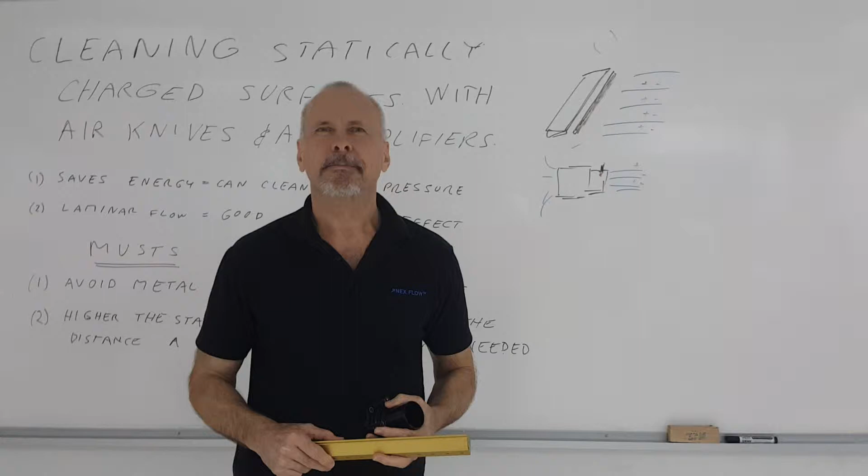The use of air amplifiers in cleaning a statically charged surface can be quite advantageous in several ways. This is how they work.

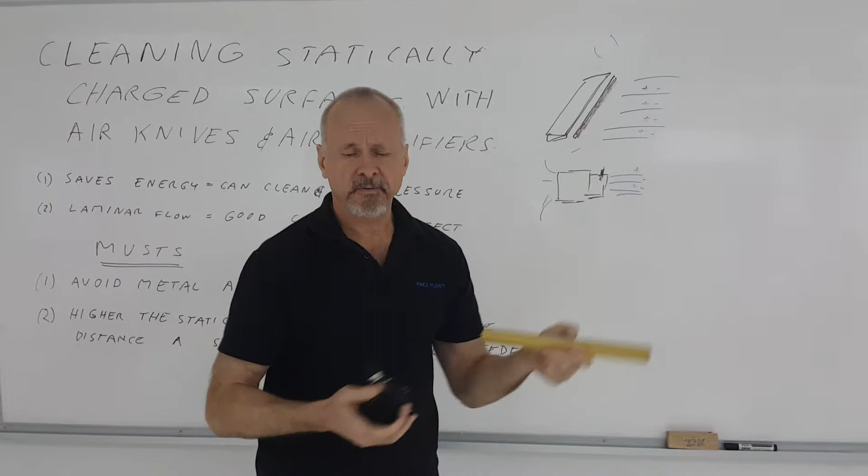In my one hand I have an air knife, which is great for cleaning a flat or curved surface. In my other hand I have an air amplifier, which is great for cleaning a surface that can be like a container or an odd shape.

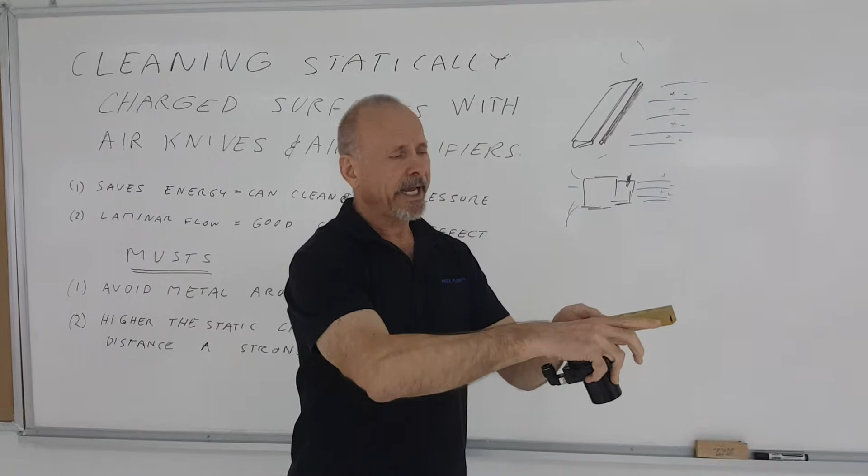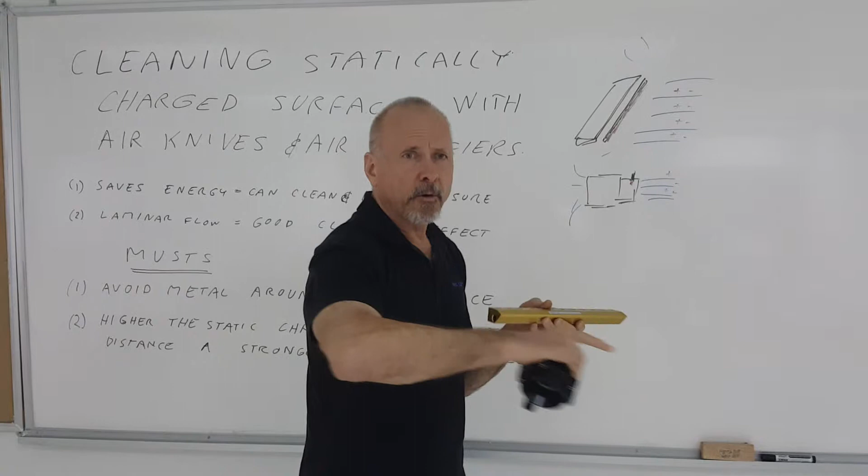If you attach an ionizing device to the air knife, or an ionizing point to the air amplifier, you can convert that flow of air into a stream of anti-static air to neutralize the surface and neutralize the material stuck on the surface, to easily blow it off.

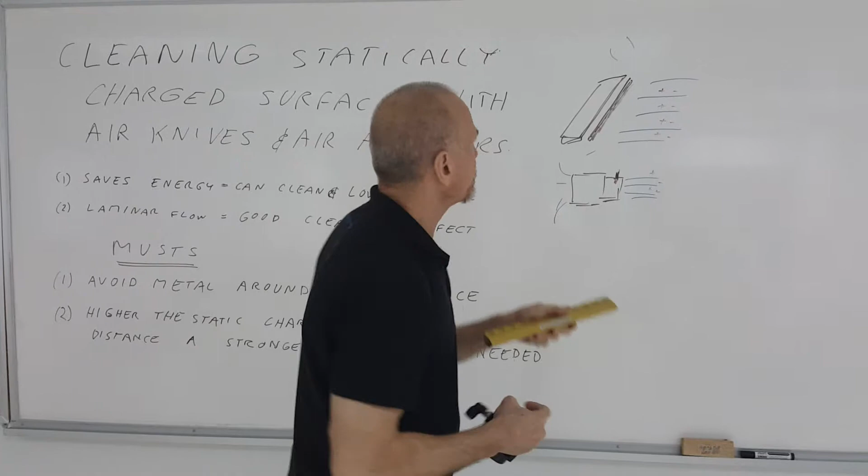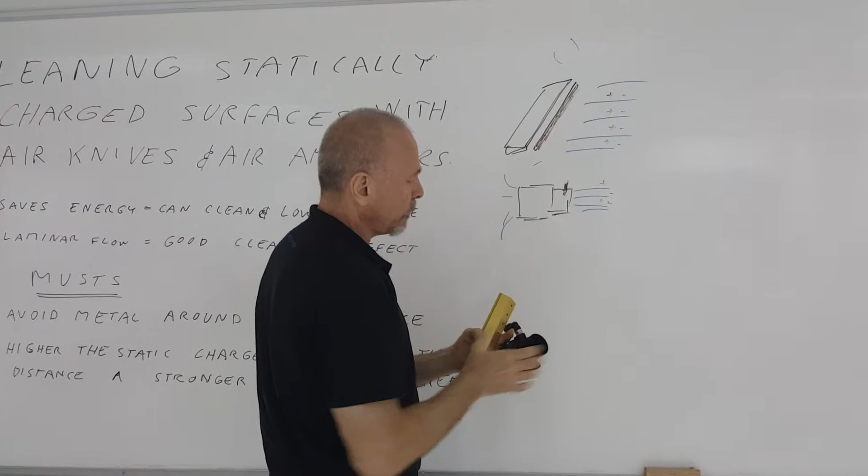With an air knife, you can easily attach a static bar or ionizing device. It creates ionized air to neutralize the surface and clean. With the air amplifier, you would attach some sort of attachment to it with an ionizing point to blow ionizing air onto the surface.

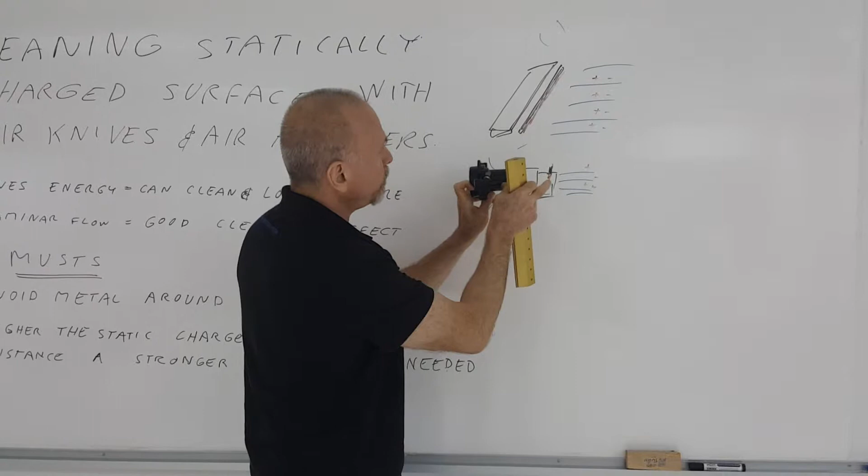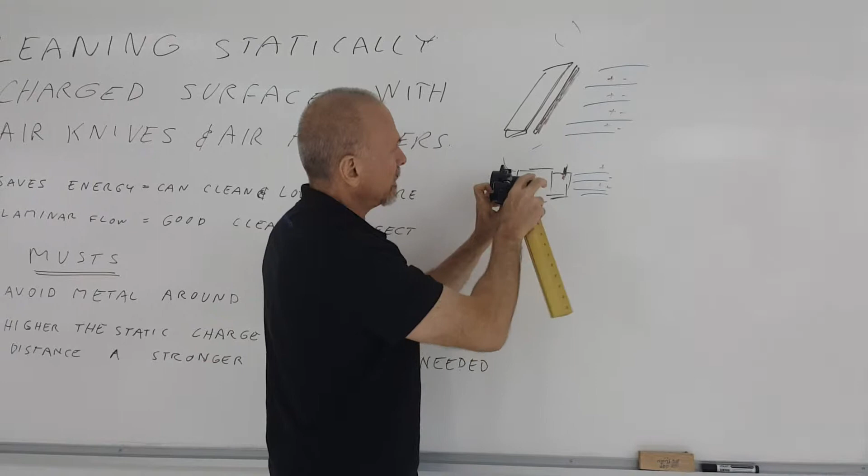Whatever that attachment is should be a non-metal material, because if it's metal, it'll tend to draw away some of those ions. It'll tend to ground it, so it won't be as effective. Utilizing a plastic attachment to hold an ionizing point would be a much better way to do it.

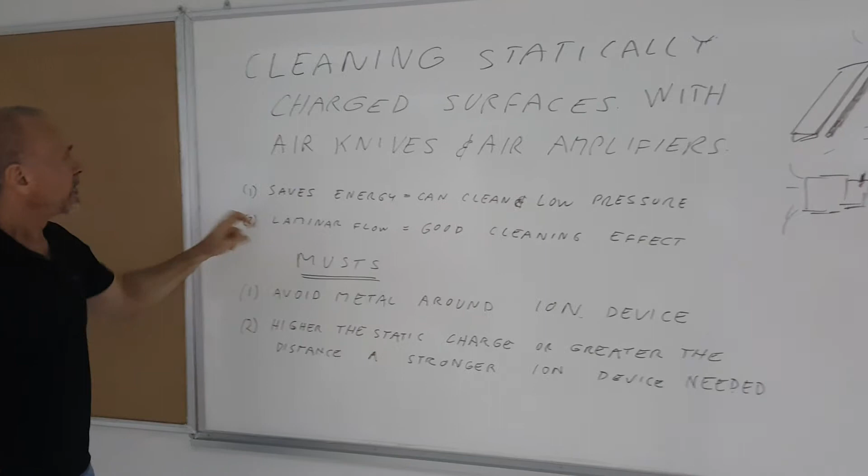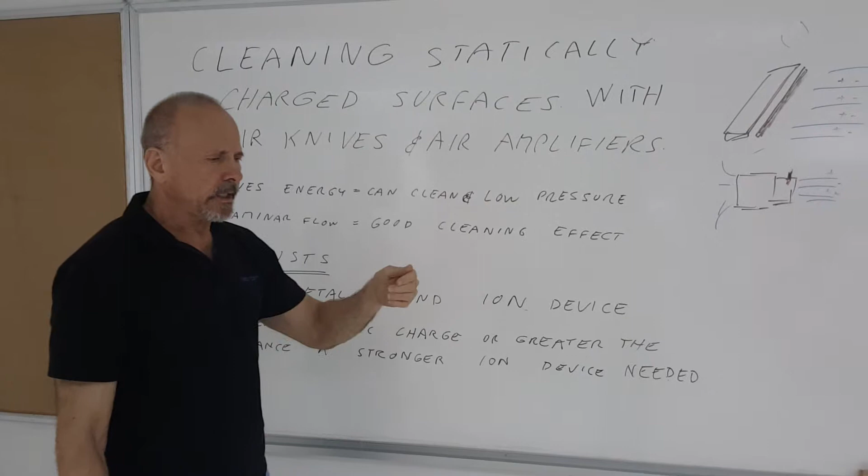So, cleaning statically charged surfaces with air knives and air amplifiers: first of all, you can save a lot of energy, because once you neutralize the surface and can easily blow off that dust or dirt, once the static is gone, it's easy to keep off.

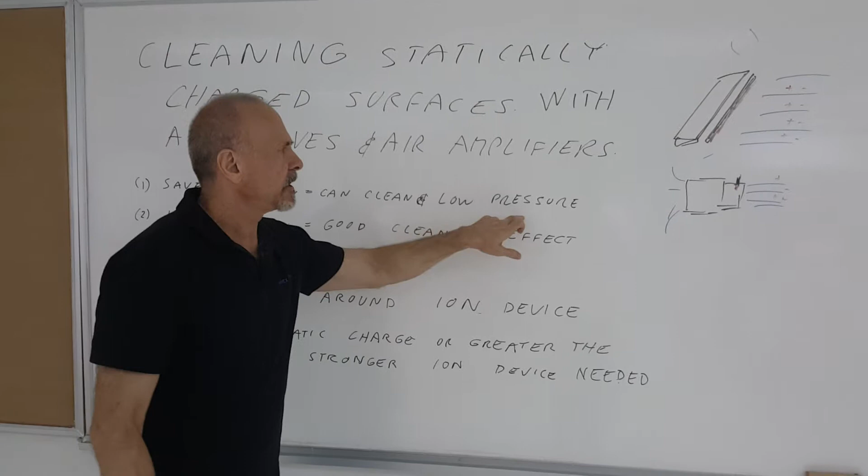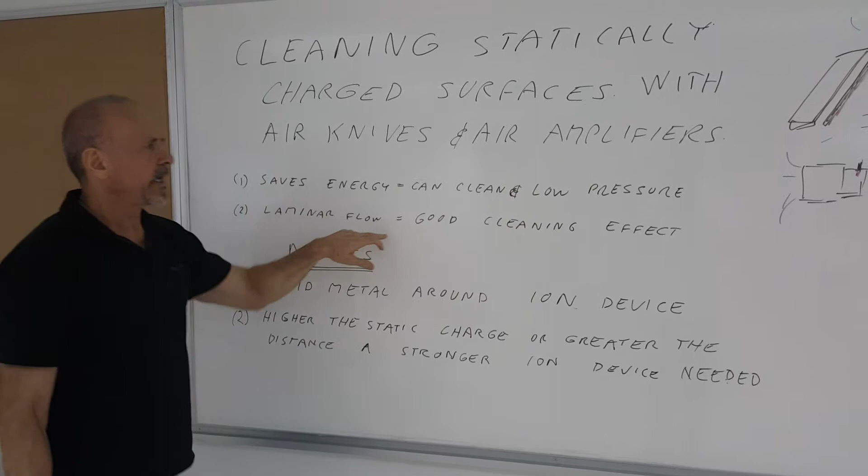When it's statically charged, the dust tends to bounce around, but when it's neutralized, it blows off very easily. So you can use pressure as low as 2 pounds per square inch to clean that surface. Secondly, you get a laminar flow with an air amplifier or an air knife. With that laminar flow, you get a much better cleaning effect at a distance from the target.

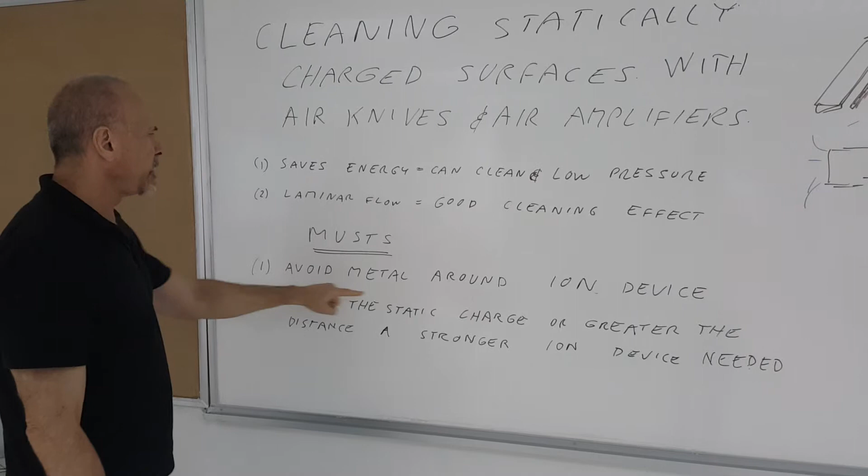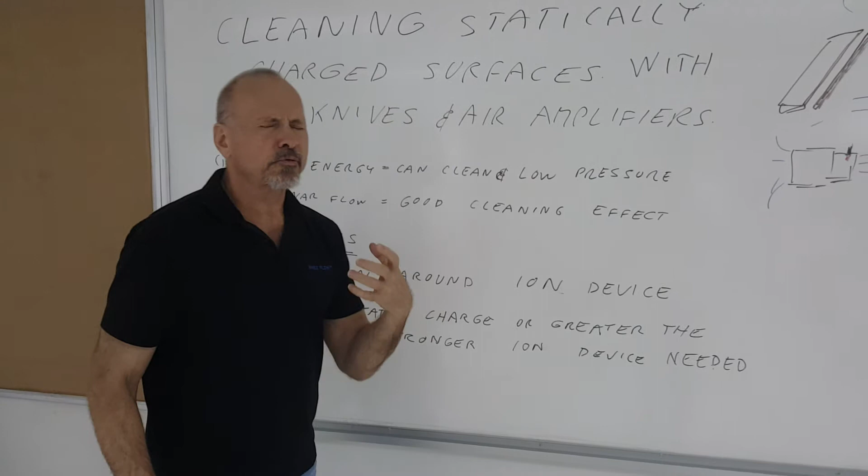Now there are certain things you must keep in mind. First of all, you want to avoid metal around the ionizing device. As I mentioned, if you're going to put an ion point on the amplifier, you want to use a non-metallic attachment. Also, if the surface is highly statically charged, there's a misconception that an air amplifier will work from like 20 feet away.

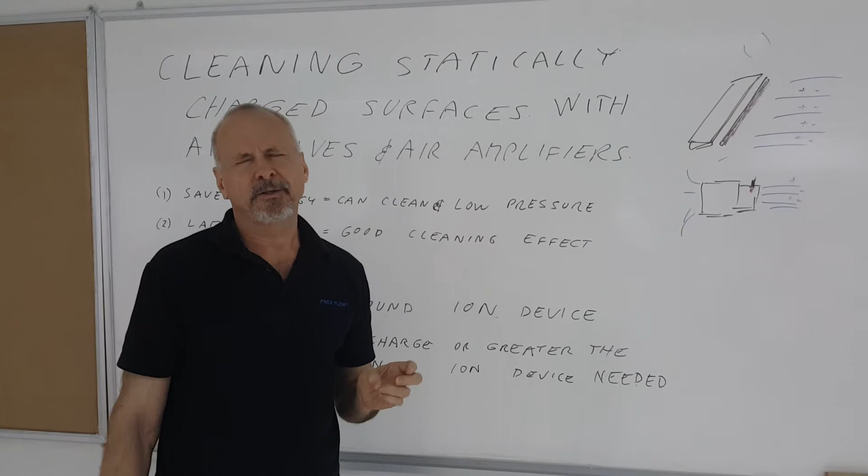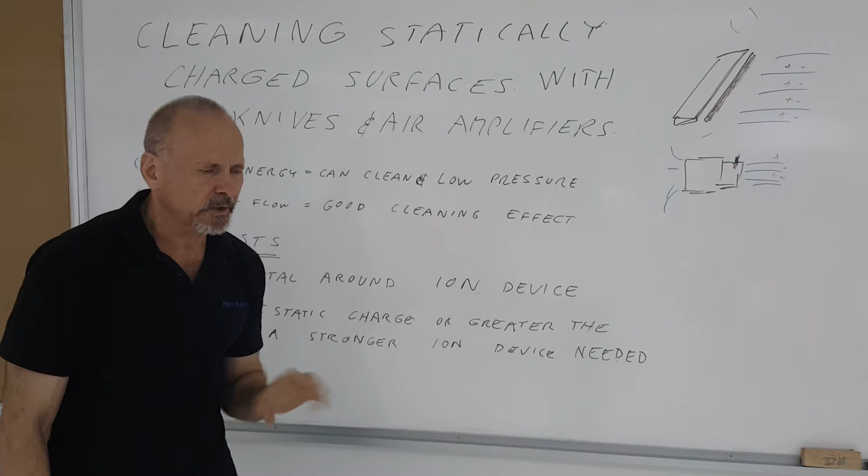That's not quite the way it works. The further you are away from the surface you want to clean, the longer it's going to take to neutralize, because the further away you are, the ions will start to dissipate as they approach that surface.

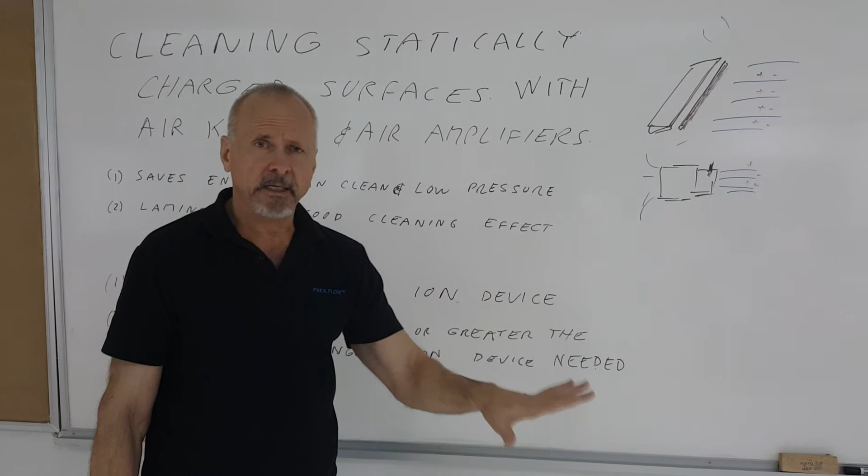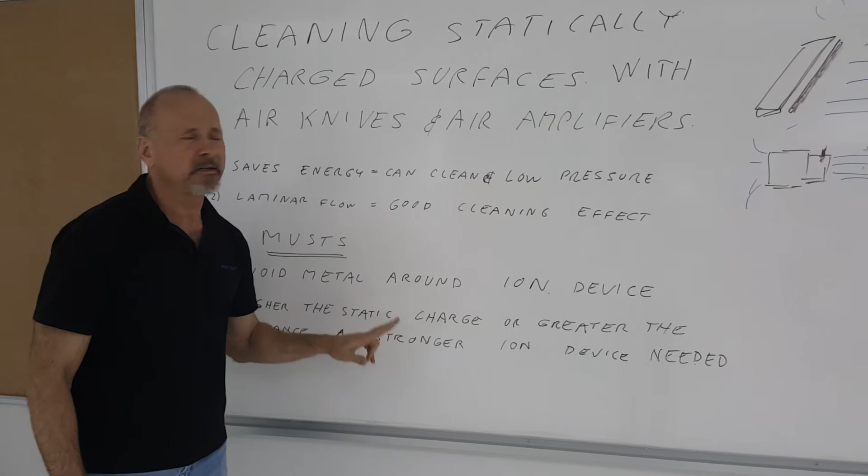So if you're 20 feet away, it could take 10 minutes to neutralize the surface, which is not really practical. So if you have a very highly charged static surface, or the surface you want to clean is far away from the blow-off device, you simply want to use a much stronger ion device, a stronger static bar, and that will do the job for you.